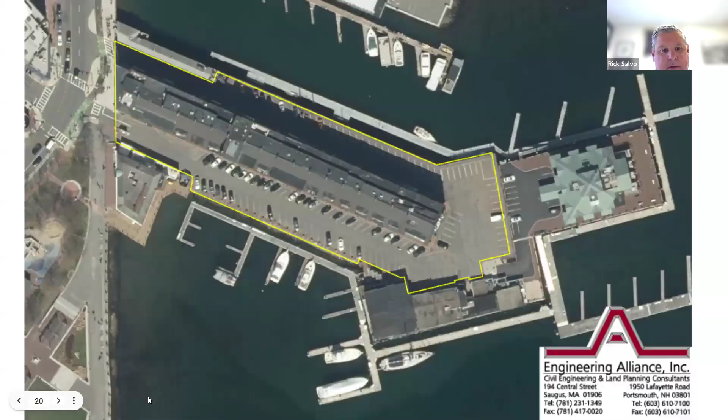Access to the harbor walk would be via the existing sidewalk for Commercial Wharf, which connects to Atlantic Avenue, and then it would connect to Yacht Haven on sort of the plan right side of the figure here. If we can go to the next slide. This is just the legislative act that Jamy referred to. This was included within your notice of intent application. I just wanted to show that it actually physically existed.

If we can go to the next page, it will show a figure of the plan that was submitted with and attached to the legislation. I was not the author of this plan, but this was negotiated as part of the legislation. And you will see, in the plans that you've already reviewed as part of this notice of intent, that we did in fact match this proposed design.

Excuse me for interrupting, Rick. I just want to clarify for all the commissioners. If you're not familiar with the site, it can look like that's a barrier saying don't come in here. That's not it. That granite block with the little flowers below connects to the guard booth, which is then open on the other side. So it's not blocking off everything you're looking at in order to get into and out of the area. Thank you.

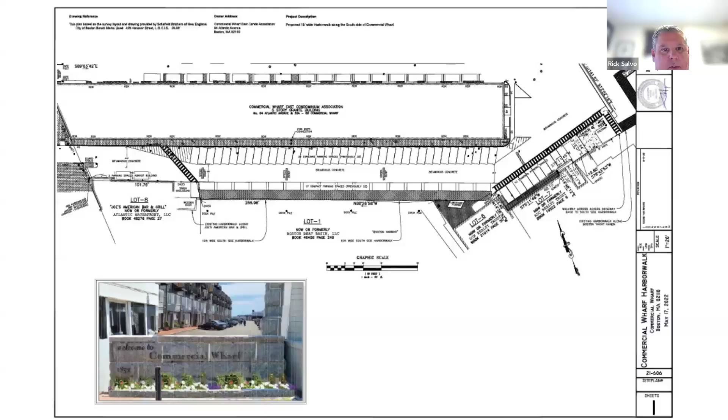All right, so if we flip to the next slide. So this is just the existing conditions survey. As was noted, the resource areas present are land subject to coastal storm flowage, and I'm going to talk in Boston City Base, just so we don't get confused, versus NAVD 88. So in Boston City Base, it's a zone AE 16.45 and a VE 19.45 on the water side. The area where the harbor walk is going to be constructed ranges from elevation 13.45 to 13.93, just to give you a sense.

If we're talking about the 2018 flood or king tide that caused the flooding, that basically came just over the top of the sidewalk on the Commercial Wharf building itself, which is about elevation 15.6. So just as a frame of reference here. If we can go to the next slide.

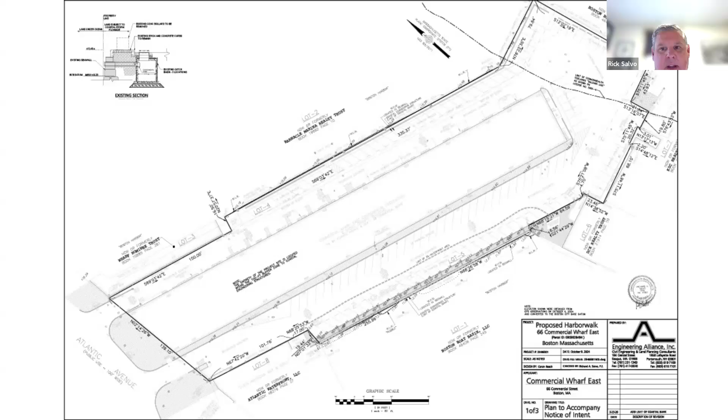So this is the area where the Harbor Walk is going to be constructed. We're looking straight down the Harbor Walk. Your back is at Joe's Bar and Grill, looking out towards Yacht Haven. So this brick area that has these 36-inch concrete caissons, the caissons will all be removed. The brick will be removed. We'll replace that brick area with a crushed stone and adjust it to elevation 13.78.

There will be a concrete wall built on the left side here, which will sort of act as a vehicular buffer to separate the vehicular traffic from the pedestrians that are on the Harbor Walk. And we'll get to this in a minute, but this was our opportunity to add some coastal resiliency into the project, and that's what that wall will act as.

If we flip to the next slide. And Ella, can you zoom in on that detail in the upper left-hand corner? I don't think we can. Oh, don't think you. Yeah.

So the retaining wall on the right-hand side, that's on the parking lot side. That wall will be constructed. It'll be a cement concrete poured in place retaining wall. It will have a footing on it that will be designed so this wall can be adaptable and it can be raised in the future. As part of this project, it will be built to elevation 16.45. The Harbor Walk is below that.

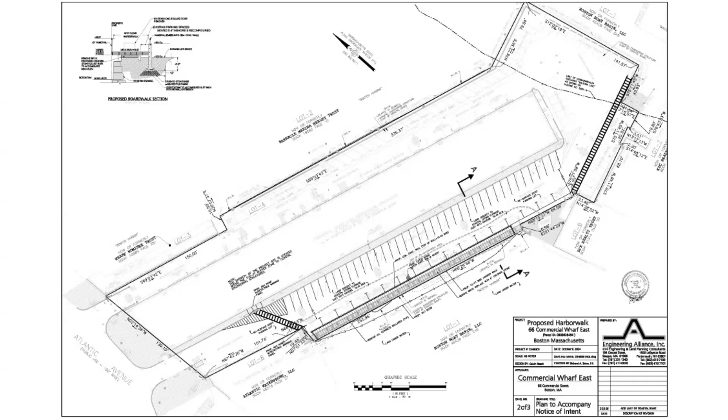It will sit on top of the crushed stone on 2x8s framing with a wooden Harbor Walk over that to the width of 10 feet with a 42-inch high handrail on the water side. So folks will be able to get from the sidewalk grade that's currently at Joe's Bar and Grill, on our property but adjacent to Joe's Bar and Grill, ramp up at about a 5% slope, so we wouldn't need any special ADA accommodations, and meet ADA.

Ramp up to elevation 14.57, extend at elevation 14.57, and then extend back down to meet the grade on the other side, about 260 feet away. All of this construction happens on our property. Like I said, the retaining wall was twofold.

Number one, as you can see, we now have a reconfiguring of the parking, and we have parallel parking spaces against that wall. So it'll be a separation from the vehicular traffic to the folks on the Harbor Walk, and also be a beginning of a coastal resiliency program in this area. So as I said, this wall will be built to elevation 16.45 as part of this project. It will be adaptable to be able to be raised as high as 21.5, which are the elevations that have been talked about during the various projects and discussions that have happened around the north end in terms of discussing coastal resiliencies.

There is a low point about 3/4 of the way down the Harbor Walk. That's the most vulnerable space, pretty close to where that AA cross section is shown. That's the lowest point. So the wall will certainly start to provide some immediate relief for the folks at Commercial Wharf, because that low point will sort of be blocked by the retaining wall, which would serve to keep floodwaters out until floodwaters raise to the point at each end where we don't have control over the land, where it would still be allowed to flood around that.

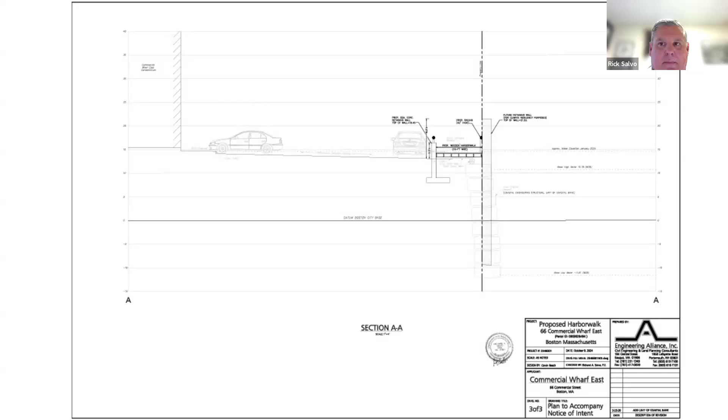So what you were describing then is the wall adjacent to the parking that would get taller? Correct. That could, yeah, it's able to be made taller, yes. And the way that we would do that is we would design the footing and the steel in the wall such that it could be extended. Gotcha. Okay, so the harbor walk is outboard of that. Correct. Okay, thank you for that clarification. That's all I have.

Okay, thank you. Commissioner Estes Margiazzi? I don't have any detailed questions on this. Okay, thank you. Commissioner Herbst?

I just wanted to double check. I thought this wasn't in a V zone, or adjacent. It's directly adjacent to the V zone, yes. Okay. So the property owned by Commercial Wharf is not in a V zone. Right. But you may see wave action from a V zone. They do. Yeah. Forgive me for repeating it, but I think it helps for everybody to think.

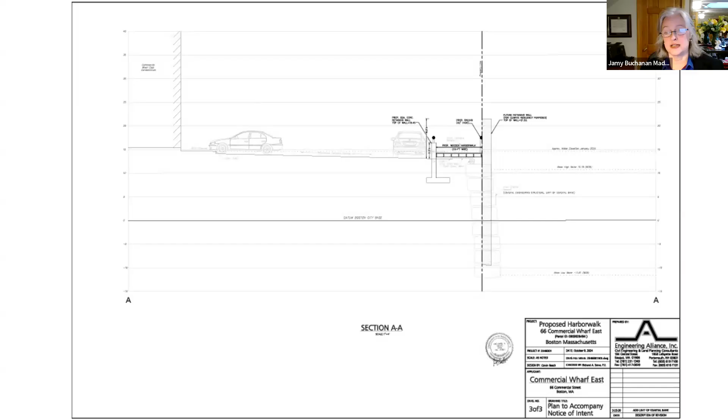2018 is when you saw enormous flooding all over Boston. And even then, there was rising waters up to the curb on the edge of the building, but not to the building itself. And that was even in 2018. And it's not intense wave action. It is classic rising waters. Okay. I don't have additional questions.

Okay. What were you thinking, Commissioner Herbst? Are you looking for some sort of... No, I just wanted to clarify because you had said you thought it wasn't in a V zone, and I mean it is V zone waters there. So, but I don't have anything further. Yeah, I guess I was just looking at the property, off the property. So this is adjacent, apparently. Got it. Thank you. Okay.

Okay. I guess we have some hands raised, and I just want to reiterate what was said at the top of the hearing here. This is the Conservation Commission, and we are charged with the work that is put in front of us and how that work may or may not impact wetlands resource areas. We're not really involved in design, except to the extent that it could impact resource areas itself. But with that, we'll go to the raised hands here, and let me see who is first. Okay, Phil, if you'd like to unmute.

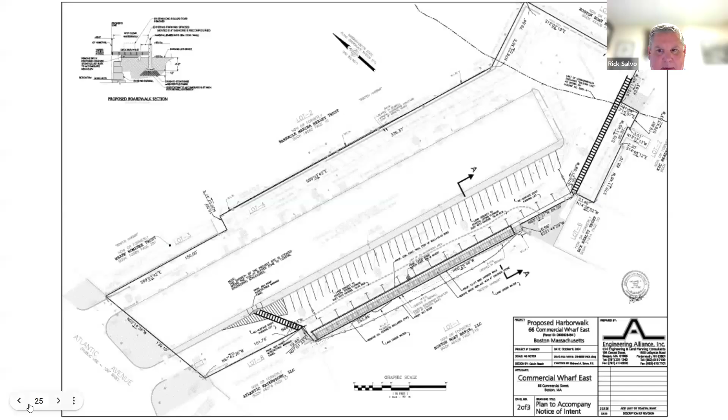Oh, there you go. So where the gap exists is that little curb that's about 6 inches lower than the brick. So if you imagined the harbor walk sitting on this brick and extending out to the edge of the wall, that's where there could be a little gap. And elevated, Rick. Correct.

And as you can see from the photograph, there's no place for a sizable fetch, as they say, a wave, to come around and then sweep over and somehow overwash here. It's a favorite allegation to get a factual dispute on an appeal, which is most likely what will happen, but that's not a realistic situation here. If you look in this photo, you can see Long Wharf on the right-hand side that protects this pretty well. Okay. Commissioner Herbst, anything else? Nope, I was just trying to explain what I read in the MEPA final report. Thank you very much. Very useful.

Okay, so before we go on with verbal testimony, I just want to state that in our files, we have 4 letters from abutters in support of the project: Ms. Gordon, Mr. Mazzarella, Ms. Hoffman, Ms. McDonald, and a support letter from City Councilor Louis Jean. So go back to public testimony. Lori?

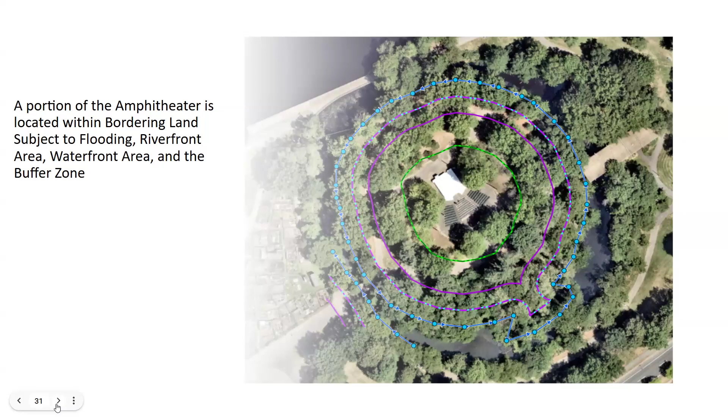And here's the floodplain. I did put that on two separate images because it just got too muddled with those multiple concentric circles as well as this. So when we started looking into the maintenance of the roadway resurfacing and other maintenance of the amphitheater itself, we noticed it was an opportunity to install some stormwater BMPs out there. Currently, there are no stormwater BMPs. So the roadway surface is shed to grassy areas, which then go to the moat that surrounds the amphitheater island with no treatment or pre-treatment.

So we came in down in the lower areas to put in a constructed, it's called a subsurface gravel wetland. It's not a wetland in the sense that we all think of wetland. It's just an engineering term for it, as we did not have suitable separation to groundwater to go ahead and create a full-on infiltration basin there. So we're just going with the wetland swales surrounding the perimeter of the outer road.

They will be constructed within bordering land subject to flooding. There's no fill being placed in the bordering land subject to flooding, so it's going to end up in an approximately, I think, 4,450 cubic foot increase in floodplain storage. Which sounds like a lot, but we are talking about the entire Charles River, so it's an incremental improvement at that, and that will retain water for a little bit through the attenuation on smaller storms. More than likely infiltrate all of it. And then for the larger storms, there will be a discharge to upland areas that are in between the moat and the stormwater swales. And if we could go to the next image, please.

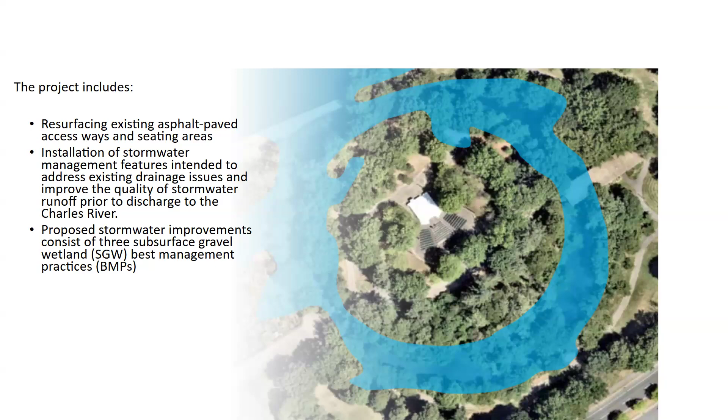And this is just a selected page from the notice of intent. The commissioners all have this. I'm sure you can open it up at a scale that's a little easier to read than this. But I think this just kind of gets the point across where the stormwater BMPs will be just ringing that outer road to prevent untreated stormwater from getting into the moat and then the Charles River itself. Native vegetation will be placed within the swales once they're constructed. There'll be no trees or shrubs or anything like that. It's all low-lying vegetation.

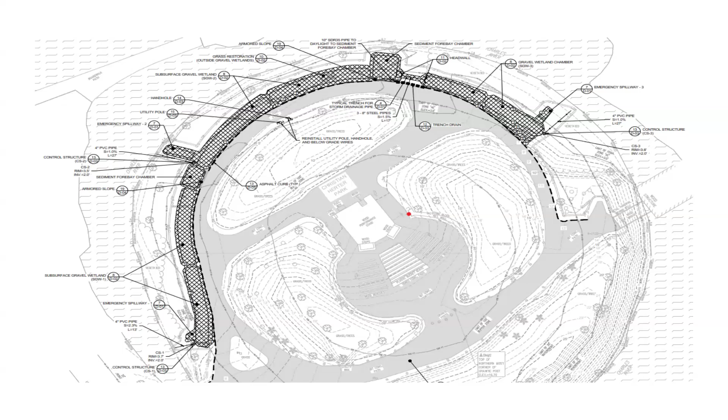Just instead of putting something that would develop a large root ball that close to the roadway or anything that would start to hang over the roadway and become an additional maintenance problem. It's all just going to be low-lying vegetation. Relatively simple project, and I'd be happy to answer any questions that you may have. Great, thank you, Tom.

Yep, I don't think I have any questions here. I note the email between you, Dee Dee, and Jenna at DEP. And I think you made that point in your presentation that the proposed BMPs will not include placement of fill that would displace flood storage volume. Eleanor, was that the only comment that we got back from DEP? I believe so, yes, that was it. Okay, great. What else do you have on this? I didn't have anything to add, just some photos in the drive for the commission's review. We conducted a site visit, but other than that, I think that Tom covered everything in his presentation.

Okay, thank you. Commissioner Linay? I don't think I have any questions, actually. Yeah, okay. Commissioner Smargiassi? Nope, no comments on this maintenance project. Okay. Commissioner Herbst? No comments either.

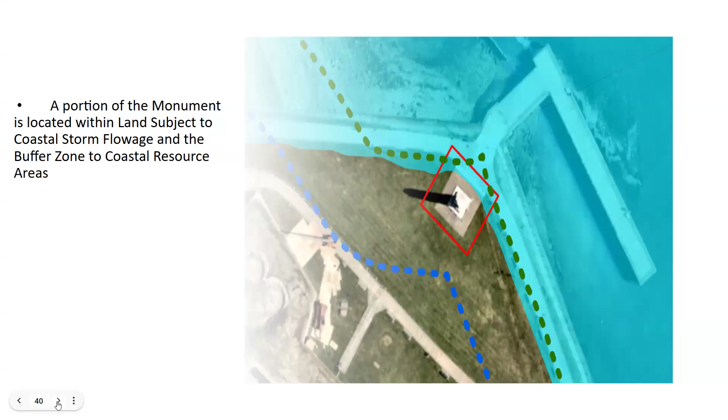All right, so the project is going to include the removal and replacement of the concrete surrounding the monument, and that's just that large concrete rectangle that's outward of the granite base of the monument itself. They're going to repair the steps that lead up to it, and install a new ADA ramp leading to the monument that, as you're looking at this photo, will be to the right-hand side and will tie into the backside of the monument.

And then there'll be a small stone diaphragm along the southern side of the monument near the ramp in order to attenuate some stormwater. There are a couple of stormwater drains out there in the lawn now that it will tie into and infiltrate. Next slide, please.

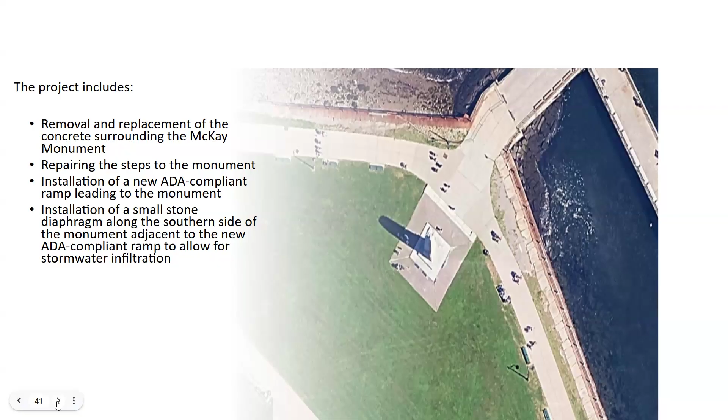And here's just a quick screenshot of the plan set. We could see the ADA ramp off to the left of the monument, and it was moved that far away in order to minimize any amount of excavation or disturbance in order to get the correct grade leading up to the back of the monument. We found that when we moved it closer to the monument, we ended up with some fairly steep slopes and a drop off on the left-hand side of the monument platform. So we moved it over a little bit.

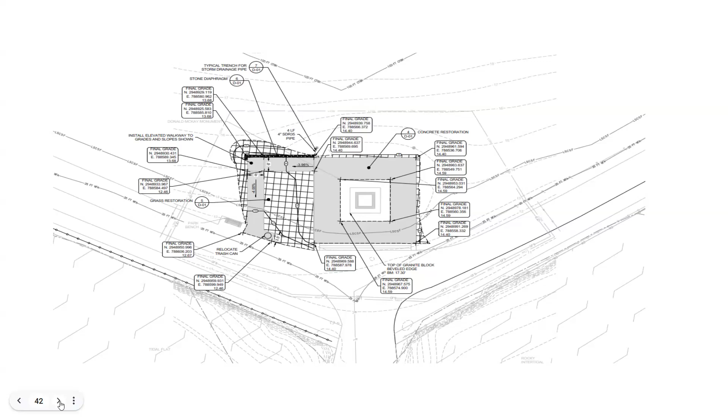All the lawn areas will be reestablished in between the ADA ramp and the monument itself. Erosion controls will be set up. Equipment and materials, once again, will be stored out in the parking lot on the other side of the fort, away from this area here, and nothing will be stored within the land subject to coastal storm flowage. Next slide, please.

There are lots of voids in between the base and the granite base of the monument that are relatively deep. We're not sure yet, but we'll figure it out once they start to excavate, backfill, and compact that area in order to stabilize the monument itself. Next photos, please.

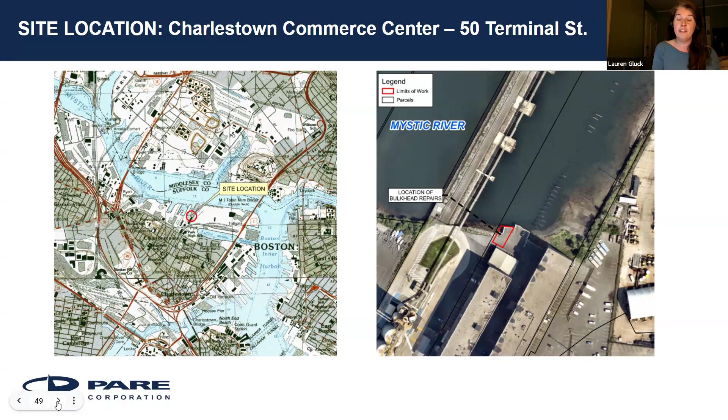Just to orient you to the site here, our site is at 50 Terminal Street, bordering the Mystic River. There's a close-up view at the aerial on the right, where there's a recently completed bulkhead rehabilitation project, and our site is just at the western limit of that, to the north of the CCC building. Next slide, please.

Okay, so some background on the project. The steel sheet pile bulkhead supporting the site was recently rehabilitated. The work was completed back in 2022-2023 under DEP file number 006-1748. So in addition to this notice of intent tonight, we are requesting a certificate of compliance to close out that project prior to approving the currently proposed work, as that order of conditions has since expired.

But we did take a look at it during our site visit, and Elena and the other staff members seemed satisfied with the work, and it was completed in accordance with the approved plans. Next slide, please.

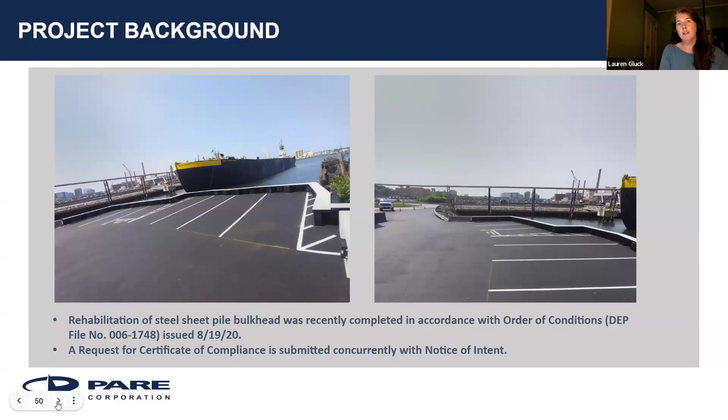Okay, so here are just some photographs of the area of the project that needs some help after some erosion and pavement. I'm sorry, I have a little lag on my end. I can't see the slide. It's kind of frozen. So anyway, there we go. Okay. Thank you.

So right where the newly rehabilitated sheet pile bulkhead meets the adjacent riprap slope, there was some erosion observed back in fall of 2024, along with some pavement deterioration in that area of erosion. And we're currently proposing repairs to stabilize this area long term. It's a low-lying area that's receiving some runoff, and then there's some undercutting in the pavement. It's a fairly small area, but the proposed work will stabilize this area long term.

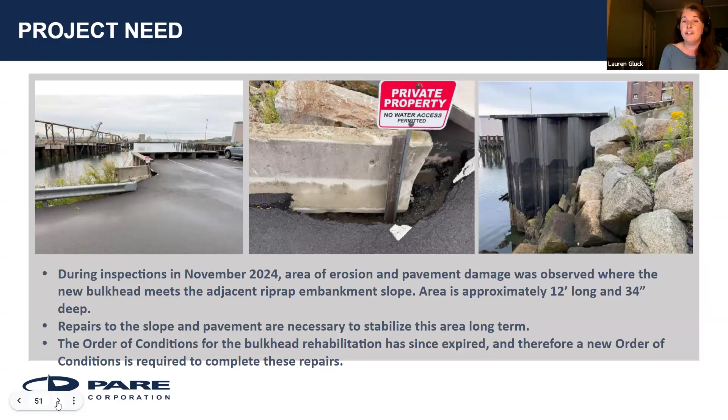It's a very small footprint within the resource area, which is shown on the resource area plan, which I believe is attached in the next slide. So we can go on to the next slide.

We have a 25-foot riverfront area off of that, and then we have a 25-foot local waterfront area off of the coastal bank. In addition, in purple is shown the 100-year flood elevation, which is elevation 10, NAVD 88, but the plans are in mean low water, so that was converted to about elevation 15.

In dark gray is the proposed repair area, which is a pretty small sliver of the slope right adjacent to that bulkhead, where we'll be installing a sediment control barrier, removing the existing riprap, and then installing an underlying bedding stone over geotextile fabric to provide improved stability and drainage below that riprap before it's then reinstalled back to the existing grade.

And then in that area of the deteriorated pavement upslope, the compromised pavement will be removed, and then a new flush concrete curb will be installed, which you can see in that cross section, to act as a cutoff wall at the edge of the pavement. And then the underlying void will be backfilled with 3/4-inch crushed stone over geotextile fabric and then repaved to match the current pavement. Next slide, please.

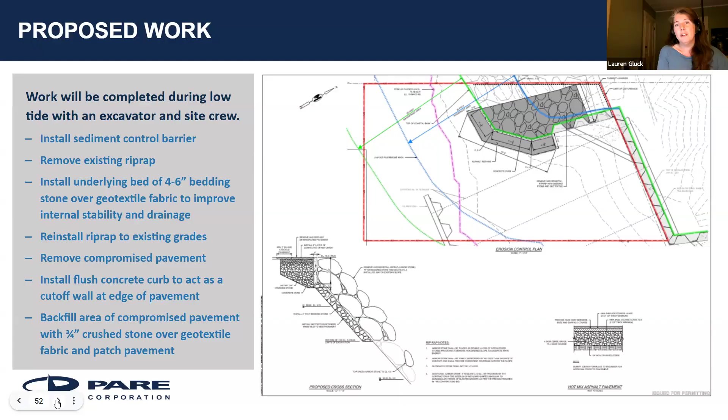And then in blue, we also just highlighted the intertidal areas where the work is proposed. A small portion of this work is below the mean high water elevation, but there's no work below the mean low water elevation. Next slide, please.

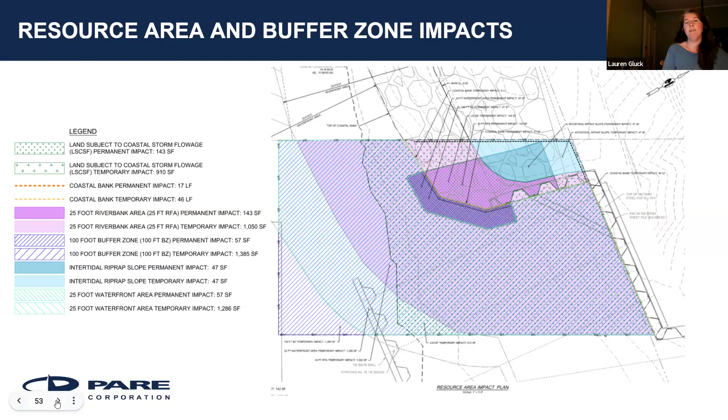And then in our NOI submission, we addressed the various performance standards under the WPA, as well as the additional performance standards under the local ordinance for land subject to coastal storm flowage in developed areas. Also, just to note that these repairs are designed to provide long-term stability to a vulnerable area, and acknowledging that the increasing wave action, sea level rise, and storm intensity requires this area to be fortified long-term.

And we believe that with this work area being as small as it is, we're avoiding and minimizing impacts. We're working entirely within man-made shorelines, and then all of the staging and stockpiling will be in the paved areas existing upslope, and we've minimized that footprint to a very small area. Next slide, please.

So that concludes our presentation, and in conclusion, we are seeking to close out the former order of conditions with a certificate of compliance, and then seeking a new order of conditions to complete these proposed repairs. We'd be happy to take any questions.

Okay, great. Thank you, Lauren. So if you don't mind, we will vote on the COC in our regular meeting. That's the way we have it laid out in the public notice. So chances are you will have an open order of conditions for a period of about 20 minutes. Okay, so we're taking that up tonight, and I've been told that all the conditions have been satisfied to issue the certificate of compliance. So we'll be taking a vote on that later.

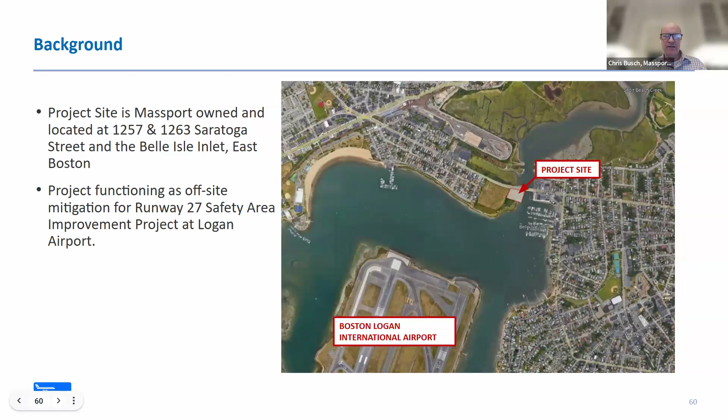Next slide, please. So for existing conditions, the shoreline consists of timber pier and bulkhead that have really fallen into disrepair, as well as mixed granite and concrete block. The community and stakeholders have actually been asking Massport to improve the condition of the shoreline, so this project gives us that opportunity. Just to the west, we've got FAA infrastructure and a localizer under the Runway 22 approach.

These parcels are part of the secure airfield, so they are fenced off, and public access is prohibited to these areas. And I'll hand it off to Paul to cover resource areas. Chris, I'm sorry, what's an FAA localizer?

Sarah may be able to speak more specifically to that, but I think it's part of the radar and just sort of approach technology necessary for airlines to safely come in to land. So those are the aircraft that are coming right over the Belle Isle Marsh, over Lynn, and right into the north end of the airfield. Okay, they sound important. Okay, thank you.

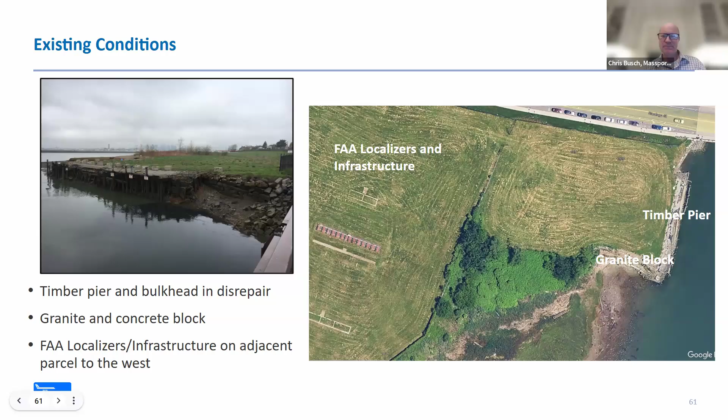Next slide, please. Thanks, Chris. I could take it from here. As was introduced earlier by the Commission, we have coastal beach, coastal bank. There is land subject to coastal storm flowage in the upland portion. The very seaward rim, about 4 or 5 feet wide for the entire perimeter, is land containing shellfish. It adds up to about 800 square feet total, I think.

And we are in buffer zones of all of those, as well as salt marsh buffer zone. There's salt marsh to the south outside of the project area. While it's technically coastal beach, given the regulations, based on some previous feedback we've had from CZM, we are calling out rocky intertidal shore.

There's a bridge abutment with some rocky stone, and then I think the Commission's aware of some back and forth we've had with CZM. So it's coastal beach, but we are also tentatively calling it rocky intertidal shore as well. Next slide, please.

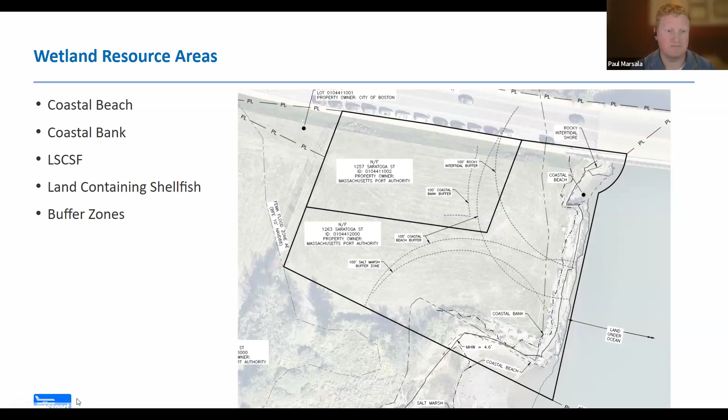So for our proposed plan, as Chris mentioned, there was quite a bit of back and forth with the agencies, CZM, and we landed at this final design. The design criteria was really based on mostly CZM feedback, but all the regulators, to maintain the existing shoreline that's to the south and continue it upward in a natural fashion until it meets the existing bridge. So really the intent is to restore what would have been the natural shoreline here had there not been a man-made structure artificially putting this out into the water further toward the channel.

So the proposed plan is to demolish the existing timber pier and bulkhead that's in disrepair. Then it would include excavation of about 5,300 cubic yards to facilitate revetment construction. This will also create coastal beach. We'll install the partially buried 1.5-on-1 stone revetment.

And this design also includes a cobble beach to the north limit, which is adjacent to the bridge abutment, to help tie into habitat, and where our design has the contours and the slope is a little bit greater than a 4-on-1. We're introducing some cobble beach instead of just relying on the natural angle of repose of sediment.

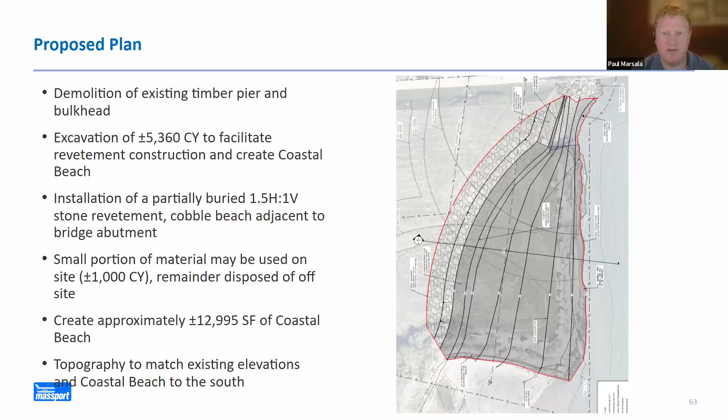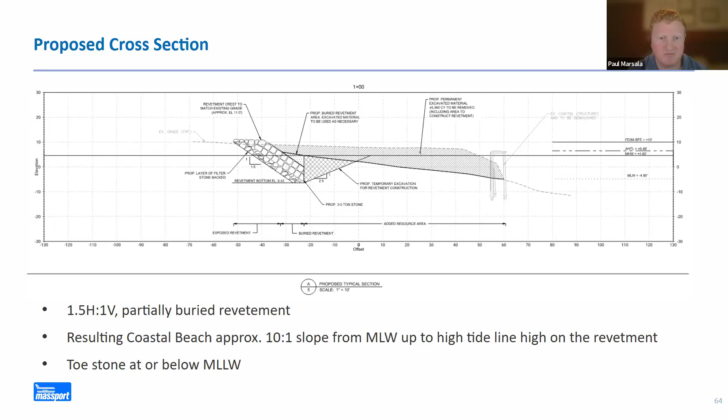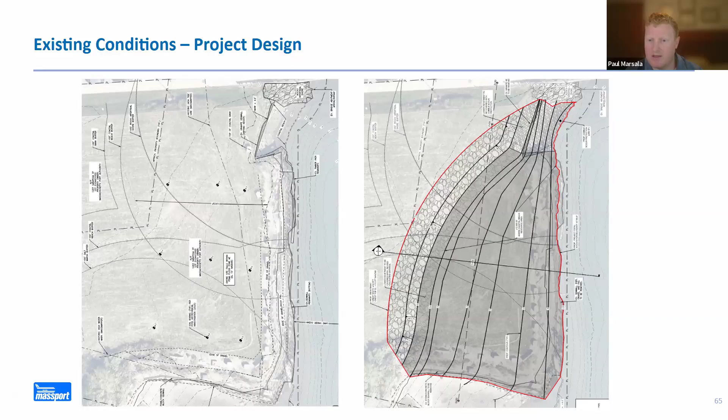So we did just want to add a little bit on the sediment itself. There was extensive sediment analysis done in support of this project. An initial sampling was done earlier, I believe, in 2024, and then supplemental sampling was done thereafter. This site is an AUL. All work was done under the guidance of an LSP. All materials at the proposed future elevations have been assessed, and preliminary risk assessment has revealed no issues with the proposed design, and the LSP will be retained throughout the duration of the project.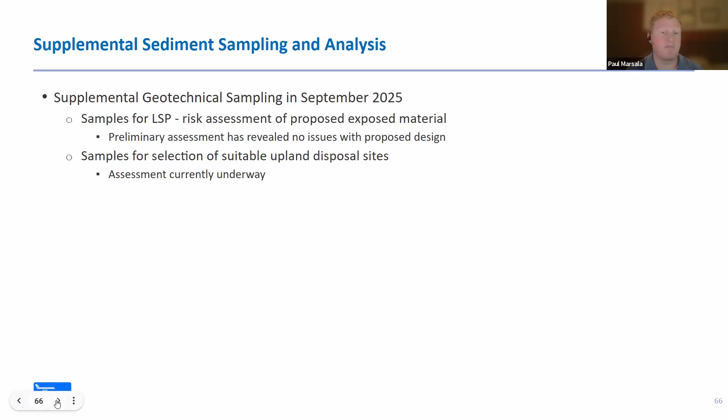Samples were also collected for suitability determination, and the assessment of an upland facility where this material is suitable is currently underway, and there's no red flags or any reason to think that this will not be accepted anywhere. I believe that's all I had, but next slide. Yeah, that's it. Okay, thank you, Paul.

So a couple quick questions for you. I guess I'll go backwards. Regarding the AUL, I'll preface this with: if there's an AUL, there is probably contaminated soil that's being left in place somewhere subsurface. So what's the confidence that those soils remain contained in the subsurface?

Yeah, so there's high confidence. So what we did was, with the additional geotechnical investigations and then sediment sampling, I believe conducted 12 samples at the advice of our LSP that went down well past the required proposed depths. So essentially the future elevations of what the proposed plan will be, we went past that.

Those increments were analyzed by the risk assessors with the LSP subcontractor to show that the future and proposed sediments that will be exposed pose no threat to health of the community, and that it all falls consistently with the determination that was in the AUL.

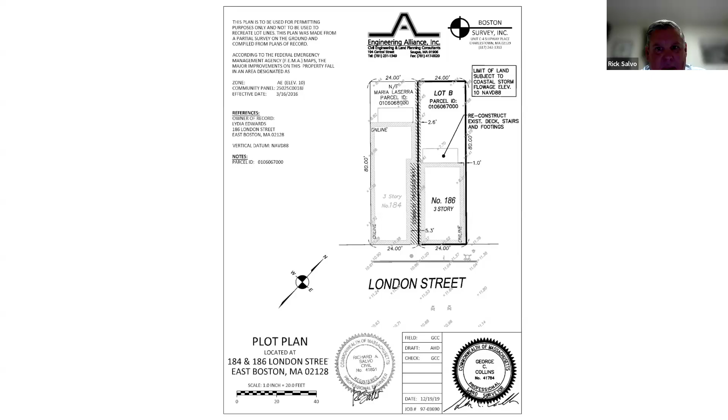So this is an existing dwelling located at 186 London Street. It's a typical triple decker that has access in the front and then a secondary means of egress out the back with a series of decks and stairs. This particular property, the dwelling itself is sort of split in half by the floodplain. The front portion of the site is about elevation 11.3, which is outside of the 100-year floodplain. The rear of the site, you can see that spot elevation is 7.7, 7.4, and that area is within the 100-year floodplain, which is elevation 10 in this case, so it's a little over 2 feet into it. If we flip to the next photo, this is what it looks like right now.

The plan is to demolish these decks and rebuild them in kind with newer, better, stronger materials. These decks have reached the end of their useful life. There'll be 3 sonotube foundations placed where you can see the 3 deck supports come down, and everything else will be built to the same line and grade with newer pressure-treated lumber and all the code requirement brackets and that sort of thing. So it's nothing new here. There's no new impact at all to the floodplain. We're just taking this old deck and replacing it with a new one. Okay. Thank you.

Okay, my only comment is for Senator Edwards. It was good to see you at the North End hearing there, but it also rekindled my resentment that you moved on to a different district that does include East Boston and the North End, but doesn't include Charlestown, which was in your city council district. So I'm not going to get over that for a while. But that being said, nice to see you. Nice to see you.

I don't have any questions on this. Elena, do you have anything? Nope, just my usual note that there are photos from our site visit in the drive folder, but nothing to add. Okay, great.

Just want to remind members of the public to provide public comment. Please raise your hand or type in the chat in the application via the Zoom meeting platform. If you're calling in and cannot use the platform, you can raise your hand by pressing *9 and *6 to unmute yourself. Send your questions to staff via email at cc@boston.gov.

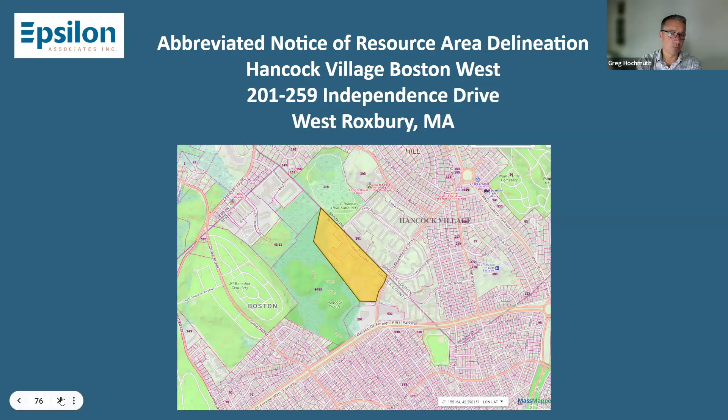Good evening. We filed an abbreviated notice of resource area delineation for one of the parcels that's part of Hancock Village. It's in the southwest portion of the property. It abuts Hancock Woods and Leatherbee Woods. And if we can go to the slideshow, I can give the commission members a little better idea of the parcel we're talking about. It's shown here in yellow. Hancock Village is rather large. We're just seeking confirmation of the resource areas on this parcel that's here in yellow. We delineated a few bordering vegetated wetlands, a small section of inland bank, and then we're also seeking confirmation of the bordering land subject to flooding that's on this portion of the property as well. Next slide, please.

So this is just an aerial from 2023 on the left that shows you what the existing conditions look like. There's some parking areas, there's some buildings. The resource areas we're talking about are in the bottom left of that yellow rectangle that you see, pretty much all along that westerly property boundary. They're pretty close to what Mass DEP shows on the image in the right. That's from Mass Mapper. It's the DEP wetland layer with hydrologic connections. Next slide, please.

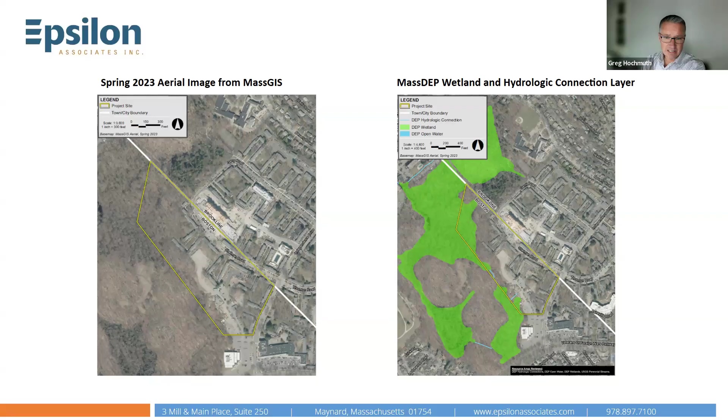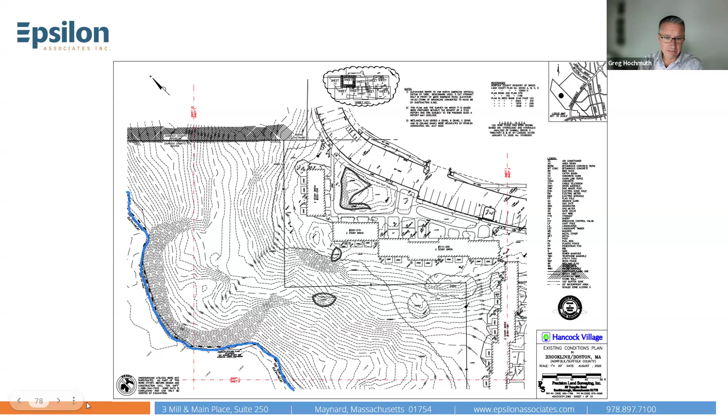So this is one of the plan sheets. It's a 10-sheet plan set. We broke it up that way just so it could be at a scale that the commission could actually read the plans. And we put some color on the plan. On this plan, the only resource area we're seeking confirmation of is the BLSF boundary, which is a Zone A FEMA floodplain. Next slide, please.

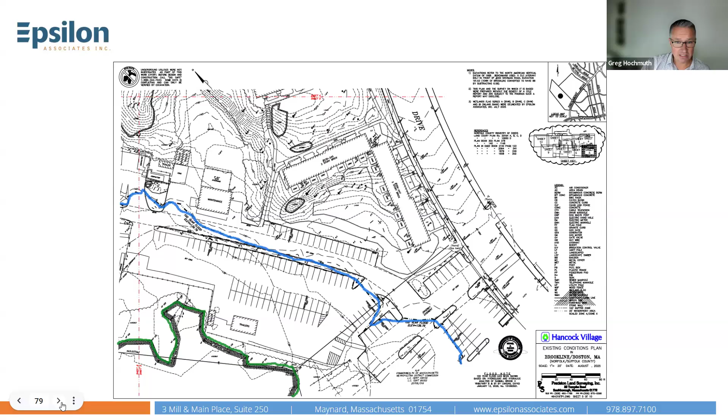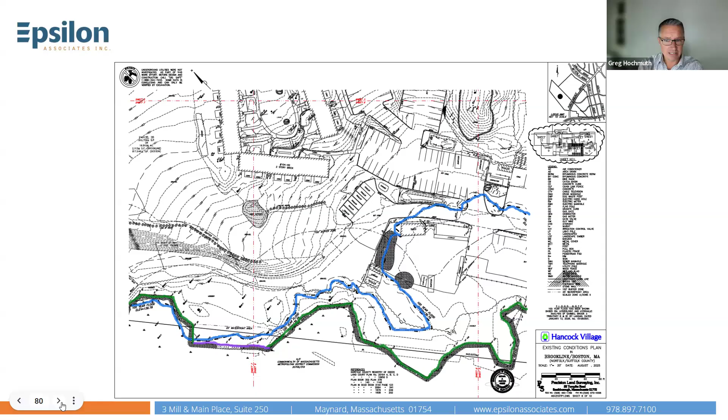And then this is that same purple line you see there. This is just moving in a northwesterly direction. The BVW and BLSF boundary continues. And you can see there's an access road that goes through there that goes to the DCR property that's out back towards Hancock Woods. That's why you see the line doing what it does there. And then the BVW boundary just continues up and to the left.

We did review these boundaries with conservation staff last Thursday. We were able to have a site walk. It was a little damp, but we got it done. We didn't make any changes to the boundary. It's pretty obvious down here. It's toe slope wetland in portions of the property that were probably historically filled well before the Wetlands Protection Act and Clean Water Act. Next slide, please.

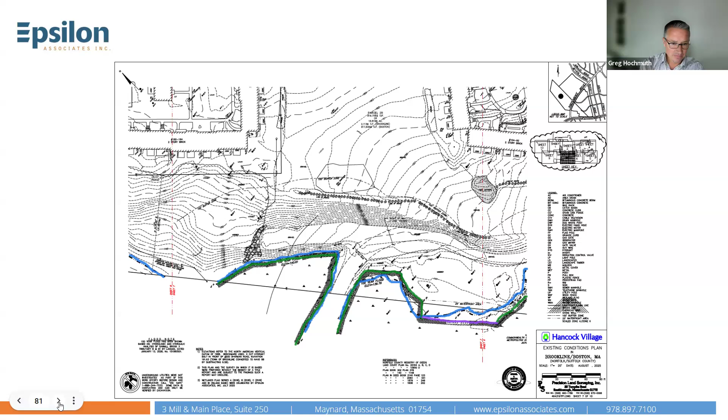And then the BLSF boundary just continues. We stopped flagging the BVW boundary just because it didn't really matter to us to have those resource area boundaries confirmed in that portion of the property. And I think that may have been the last slide showing, well, one more little piece of BLSF. And I think that's it.

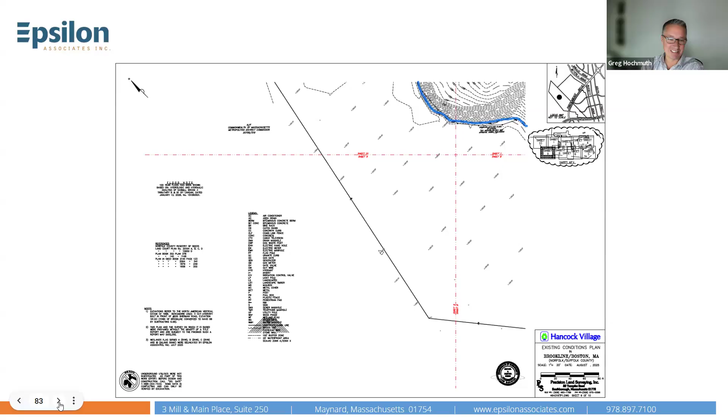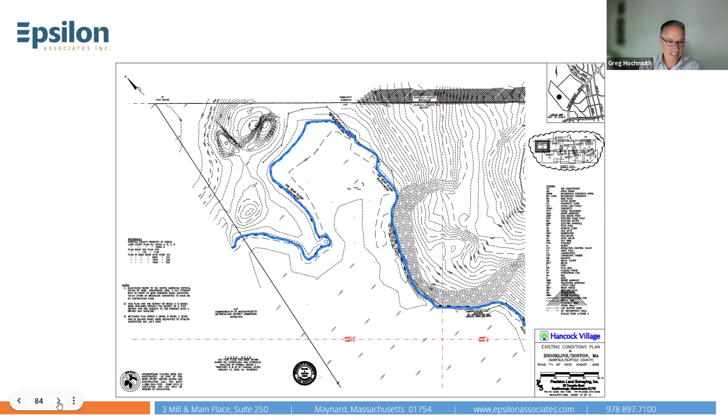Great. Nope. More to come. One more. So I will say that this BVW, it does continue towards Leatherbee Woods. It's a pretty extensive wetland system that does border on a water body. It's all BVW. There's no isolated wetlands out here. Next slide, please. That's it. Okay, great. Thank you, Greg.

Glad to see you're involved with this. Elena, you went on a site visit. What was your reaction? We did, yes. So if you've taken a look at any of the photos in the drive, you'll see some flags that are a bright pink color, and those are the most recent ones. Those are the ones that were added with this delineation. There are some blue flags that you might see. Those seem to be from a previous delineation.

And again, my disclaimer is that my training is not as a wetland scientist, unfortunately. But from what we could tell, we didn't have any concerns about the delineation itself. One of the things that did come up on the site visit is that we did see some vegetation that had been dumped in one of the BVWs, probably by a resident. So we're going to be working with Hancock Village to develop some sort of informational one-pager, describing to residents the value of BVW and the fact that putting vegetation there is not helping the wetland,

which I think is a common misconception. One of the other things that we discussed is that there's an area that has some materials being stored, like some landscaping materials, right on the edge of one of the wetlands. So we're seeing if it would be possible to move those a little bit further from that area. But those were really our main points.

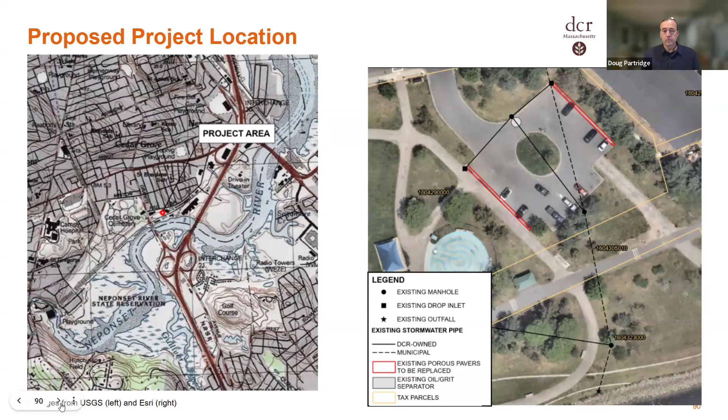Yeah, I think it's pretty straightforward. It's 540 square feet of pavers that are really overgrown, really not functioning as they were intended. As part of the park maintenance, the goal is to maintain and improve that stormwater management system. We did meet with the commission earlier, and they recommended that we submit this RDA to confirm that we believe that this falls under an exemption of management of stormwater system. Next slide.

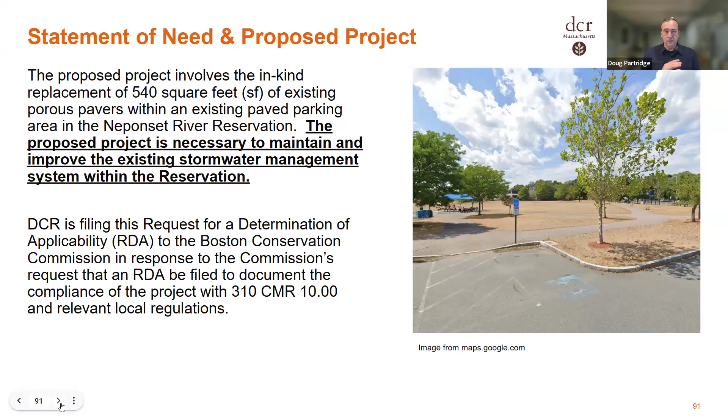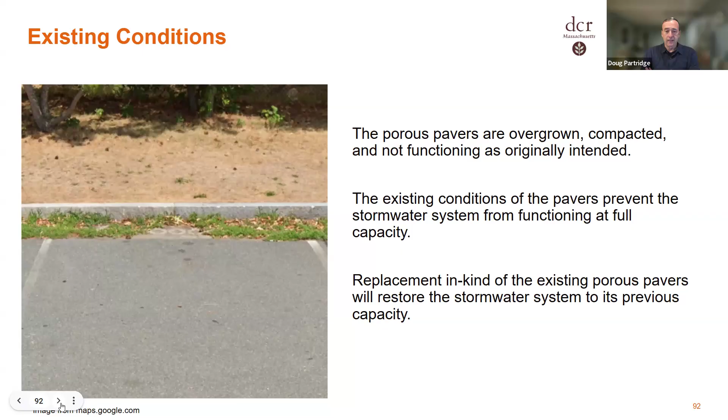Here's a picture. You can see the little triangles in the center. It's overgrown, filled with sediment, really not working at its full capacity, and we're looking to replace these in kind. Next slide. The next 2 slides are really just how we meet the exemption.

First one is it was constructed with these pervious pavers in the 2004 to 2005 timeframe under the Neponset Phase 2 Site Remediation and Park Development Program. It was constructed and permitted in accordance with all the appropriate regulations as they relate to the Wetlands Protection Act. And there's a file number here as well as a date. It was permitted under the Metropolitan District Commission, just as an FYI. In the end, the project isn't proposing to result in any change that increases the total or peak volume of stormwater management. It's really a maintenance program. Next slide.

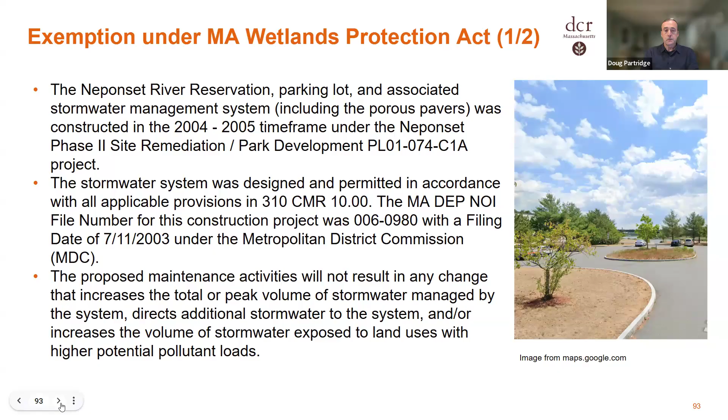And then really from the Wetlands Protection Act, these are the regulations that you all know. We addressed the date in which it was done as well as compliance with those regulations at the time. Next slide.

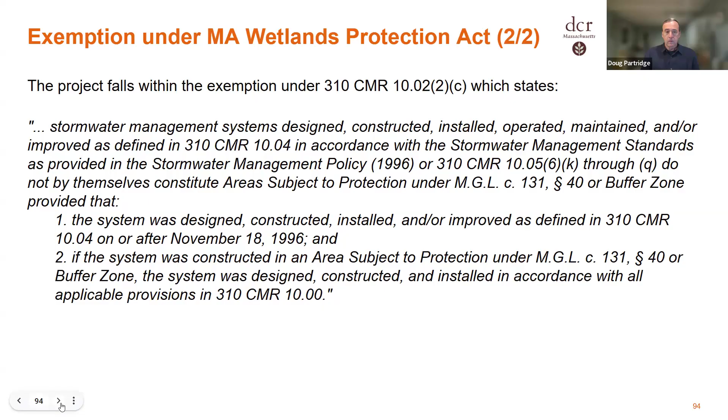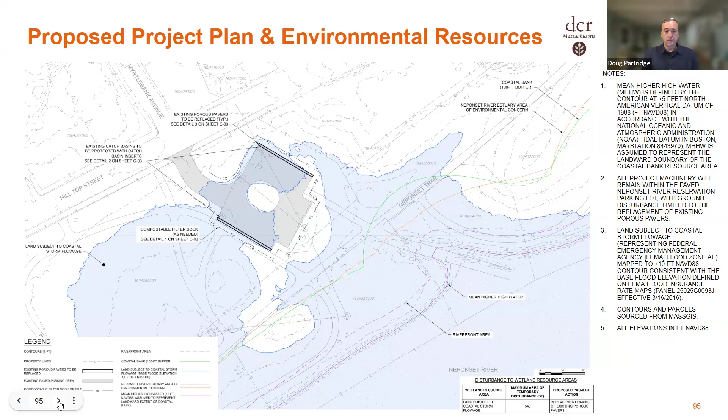This just gives you a picture of, again, they're not in red this time, but the black lines are the existing porous pavers that will be replaced. The only wetland resource area is land subject to coastal storm flowage. And so really in the end, the goal here is to really manage that stormwater in such a coastally active zone in order to properly manage that surface water. Next slide.

In terms of just what we're planning to do, utilize typical construction equipment and contractor means and methods. They're going to be excavated and removed. The following slide provides a construction detail. DCR is intending to schedule the construction to minimize disturbance to traffic and pedestrian access. That's always a consideration in terms of public lands.

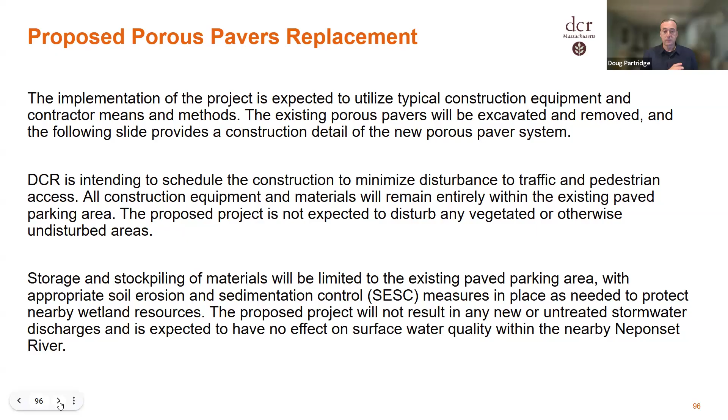All the equipment will remain entirely within the existing paved surfaces. We're not expecting to disturb any vegetation or otherwise undisturbed areas. Storage and stockpiling will be limited to the existing paved parking area with appropriate soil and erosion controls. And next slide.

Here's just an image of what we're talking about. The porous pavers being on the top, proximate to the existing concrete / asphalt surface, and with a drainage system below it, a 6-inch diameter perforated pipe, which will carry it to the appropriate catch basins. Next slide.

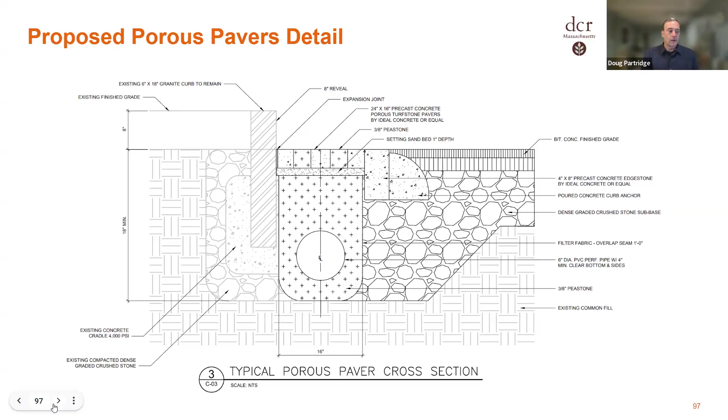Best management practices. We're really in a parking lot, right? With the granite edges to the parking lot that really are going to protect us in the grand scheme of things. That being said, as necessary, we're going to protect all the catch basins with an insert detail provided, as well as necessary compost filter socks, so that we're protecting all the adjacent areas from any sediment movement during a storm event.

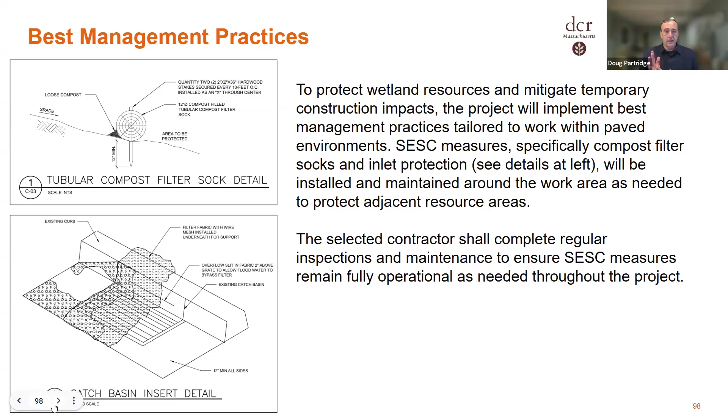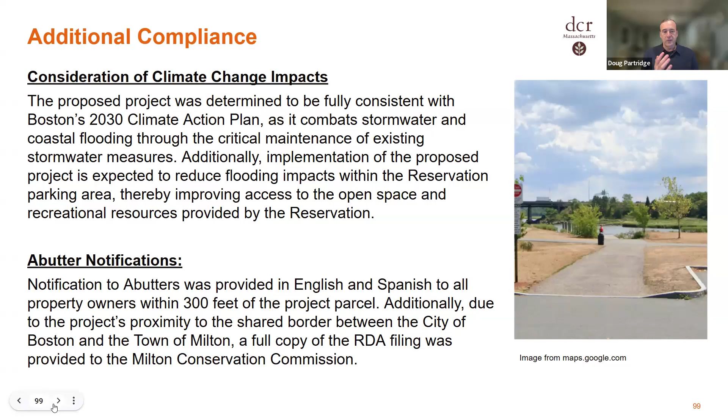And that could be it, I believe. Is there another? Nope. All right. Additional considerations. Apologies. Really, in the end, it was determined to be fully consistent with the climate action plan. I think that makes sense. And then we did provide notification to all the abutters in English and Spanish. Okay. Great.

Thank you. My only question is, how are the porous pavers going to be maintained? Are they maintained as part of the whole area? Yeah, so the DCR, pardon me. I don't know if you recall, we presented for the Pope John Paul NOI a couple of months ago. And so I believe the commission was provided a copy with the DCR's management and maintenance program. And so this would fall under that same program.

Okay. I don't think you have to submit it again, but we'll just note that it falls under that plan. Or Eleanor, what is the best way to do that? And it might have just been a link, I think. Sorry, I missed the first part of the question. Sure. So a few months ago for Pope John Paul Park, DCR, we asked for the submission of the maintenance plan for porous pavement. Yes. And so how did they provide it? Was it just a link? Is it an actual physical copy of something?

So all of our prior to construction items come in as PDFs. Okay. So that can be emailed to us as a PDF. Okay, so we have one, but you don't keep it in a central place? We divide our folders up by project. Okay. Just so that we have a direct paper trail saying that this is the maintenance plan for these pavers, I think it makes sense to just have that resubmitted to us for this site.

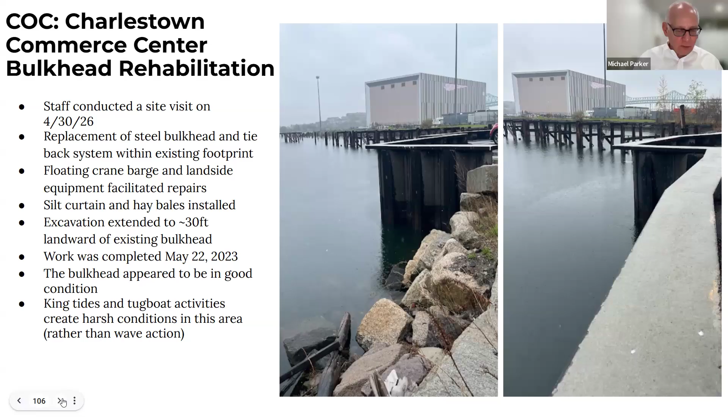So moved. I'll give a second. Second. Thank you. Commissioner Linay? Aye. Commissioner Estes-Margiassi? Aye. Commissioner Herbst? Aye. And I vote aye. That carries 4-0. Okay, Elena, administrative updates.

Yes, for the commission's review, there is a document in the drive folder related to DEP file number 006-1986. This is DCR's invasive plant management 2025 summary and 2026 plan for the Belle Isle Marsh Reservation. If any commissioners have questions after reviewing it, I'm happy to pass those along to the project team. But nothing really out of the ordinary or unexpected.

Okay. Is that a public document? So would the FBIM have access to that? That is a good question. I'm not sure. It's possible that a version of this is available somewhere. The way that it is formatted seems very specific to submission to the Conservation Commission. But I can check on that. Yeah, it feels like something we could share with them. Yeah, I'll look to see if I can find it anywhere publicly, and if not, then I can reach out to DCR. Okay, is that it for you? That's it for admin updates.

Okay, thank you. Next item on the agenda are meeting minutes. I reviewed them. Mason did a great job as usual. So I would entertain a motion to accept the meeting minutes from April 8th, 2026 and April 22nd, 2026. So moved. Thank you. Commissioner Linay? Aye. Commissioner Estes-Margiassi? Aye. Commissioner Herbst? Aye. And I vote aye.